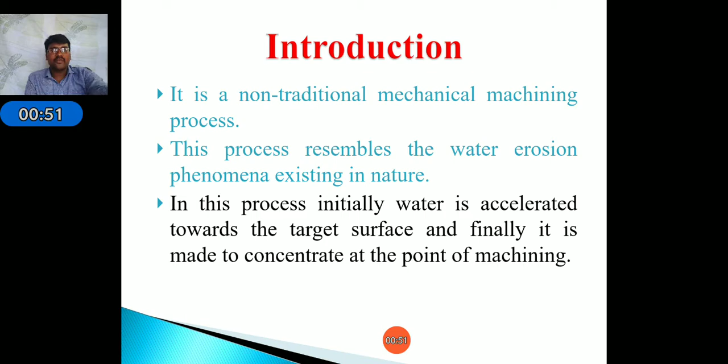Water jet machining is a non-traditional machining process in which the process resembles the water erosion phenomenon existing in nature. Initially the water is accelerated towards the target surface and finally made to concentrate at the point of machining, where the nozzle is placed at a certain distance to machine the workpiece.

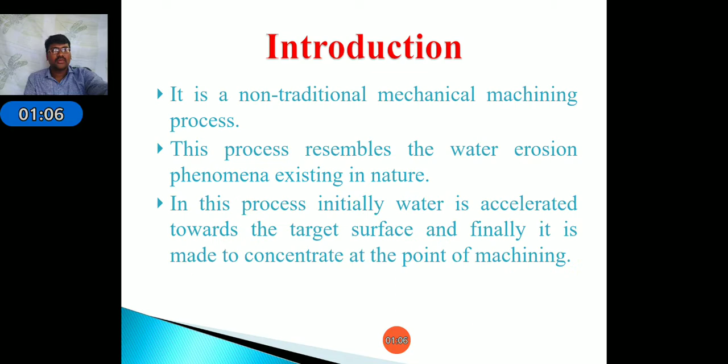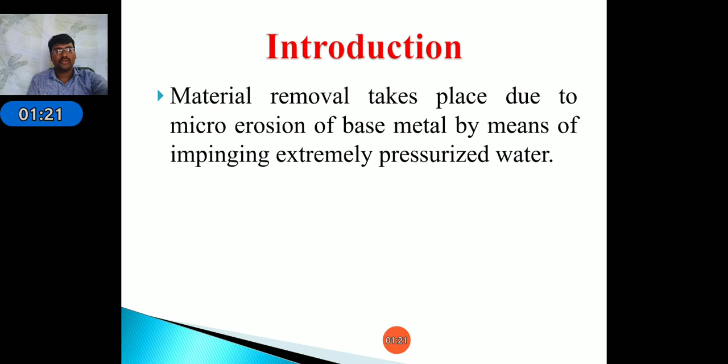The material removal rate takes place due to the micro erosion of the base metal by means of impinging extremely pressurized water. It is a cold cutting process, similar to abrasive jet machining.

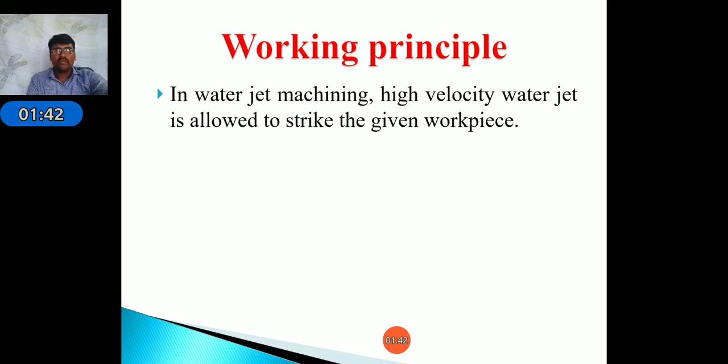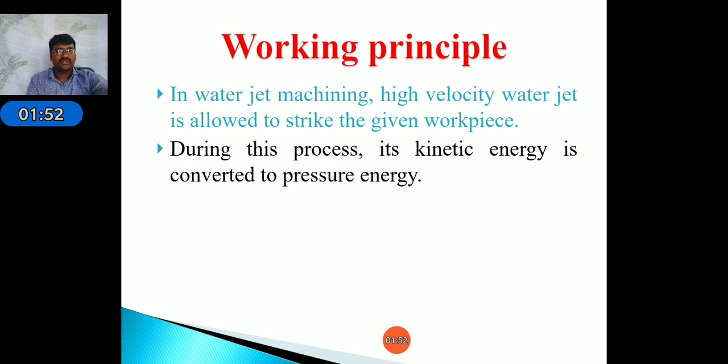Working principle of water jet machining: a high velocity water jet, higher velocity compared to abrasive jet machining, is allowed to strike the workpiece. During this process, its kinetic energy is converted to pressure energy, which induces stress on the workpiece. When the induced stress is high enough, unwanted particles of the workpiece are automatically removed.

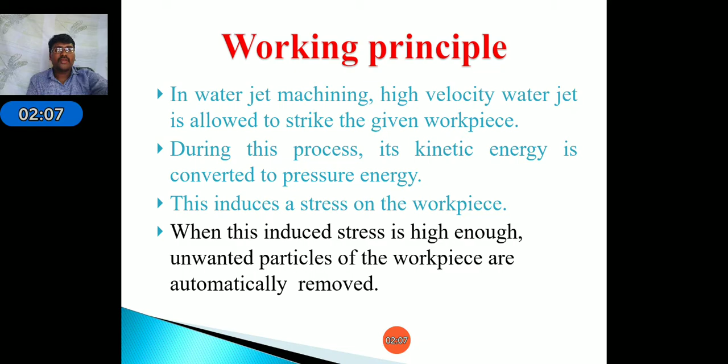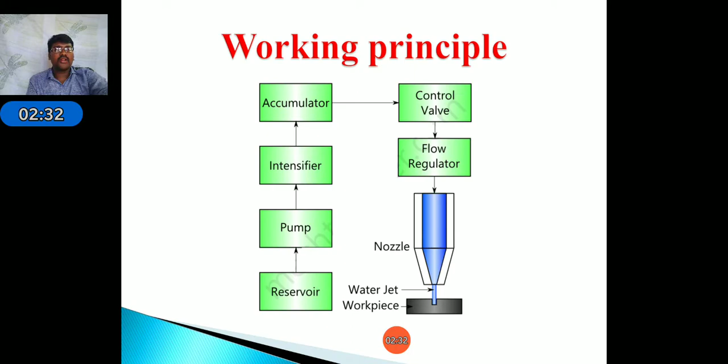The reservoir is used to store the water for the machining operation. The pump pumps the water from the reservoir stored water to the nozzle where we have to machine the workpiece.

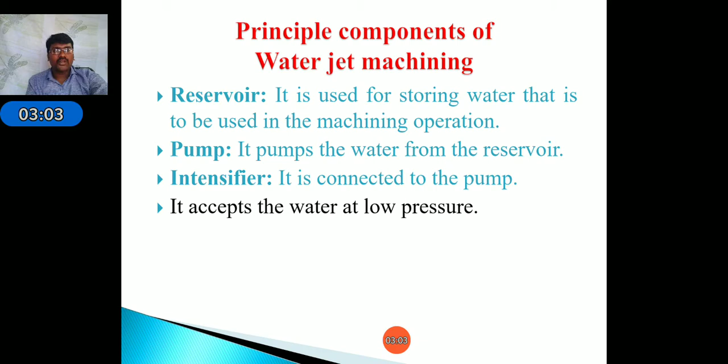What is the need for the intensifier? It increases the pressure energy. It accepts the water at low pressure and pressurizes the water acquired from the pump to a desired level, nearly 4000 bars pressure range. By using the intensifier, we can increase low pressure to high pressure.

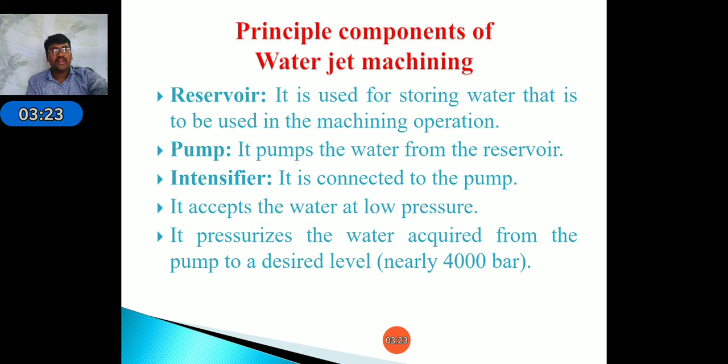The control valve controls the direction and pressure of the pressurized water supplied to the nozzle. The flow regulator is used to regulate the flow of water. The nozzle renders the pressurized water as a water jet at high velocity.

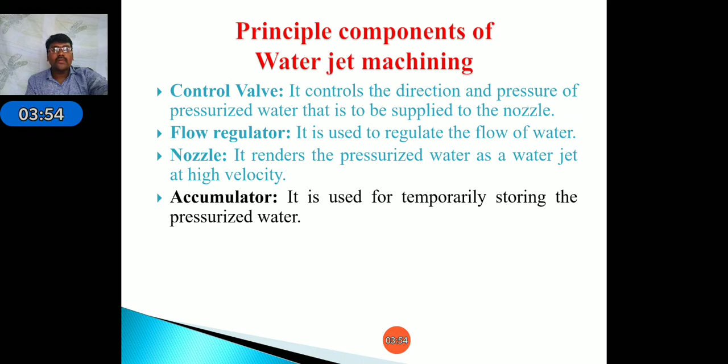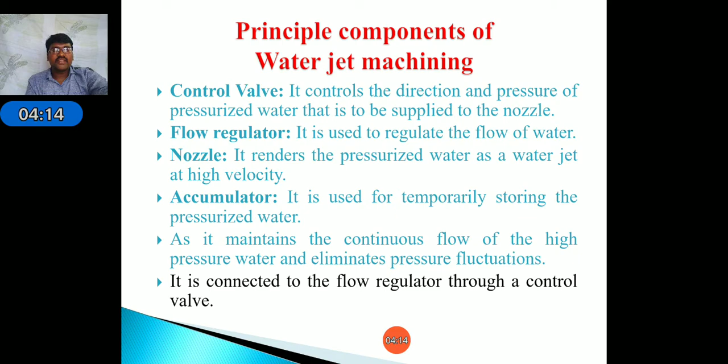The accumulator is used for temporarily storing the pressurized water. After the intensifier, we use the accumulator for temporary storage of high pressurized water. It maintains continuous flow of the high pressure water and eliminates pressure fluctuations. It is connected to the flow regulator through a control valve.

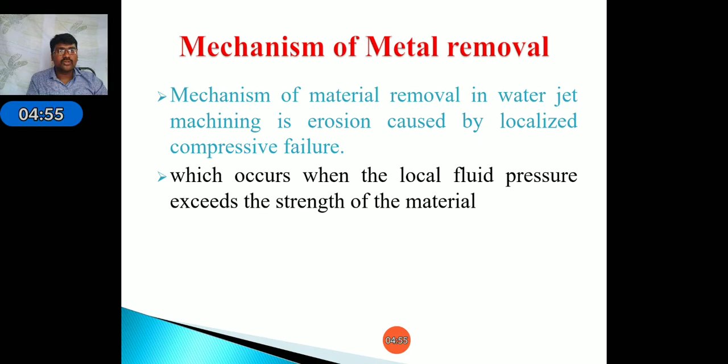Mechanism of metal removal: in water jet machining, it is erosion caused by local compressive failure, which occurs when the localized pressure exceeds the strength of the material. If the applied pressure is more than the strength of the work material, the particles where the water jet falls on the workpiece will erode, and due to this erosion the material is removed.

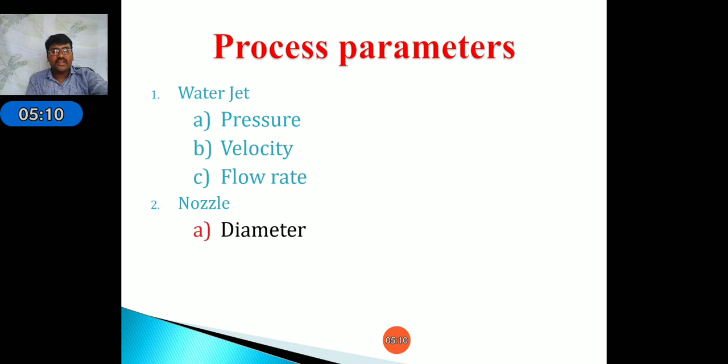Process parameters of water jet machining include pressure, velocity, flow rate, nozzle diameter, and standoff distance. Standoff distance is the distance from the nozzle end to the workpiece.

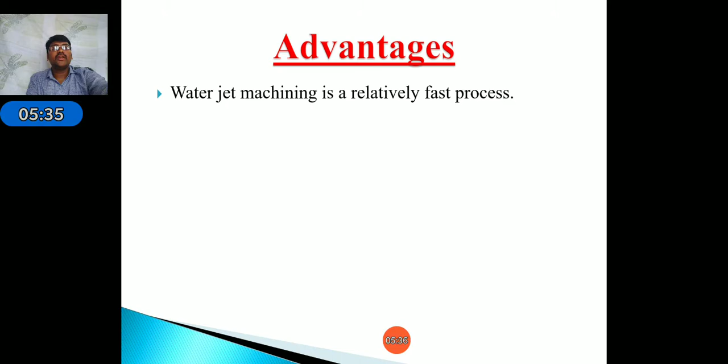Coming to advantages: water jet machining is a relatively fast process compared to other processes. In abrasive jet machining, the material removal rate is very low compared to water jet machining. It prevents the formation of heat affected zones on the workpiece since water acts as a coolant, so no heat is generated.

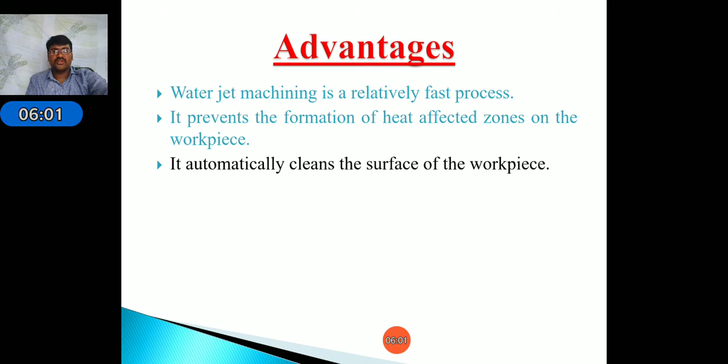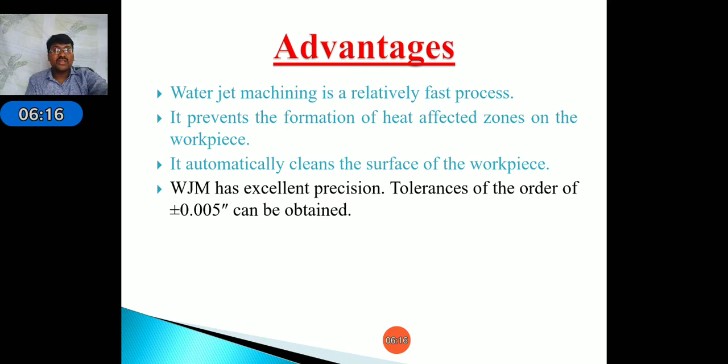It automatically cleans the surface of the workpiece due to the action of water. Water jet machining has excellent precision, with tolerance on the order of plus or minus 0.005, that much accuracy can be obtained. It does not produce any hazardous gas, and it is eco-friendly. These are the advantages of water jet machining.

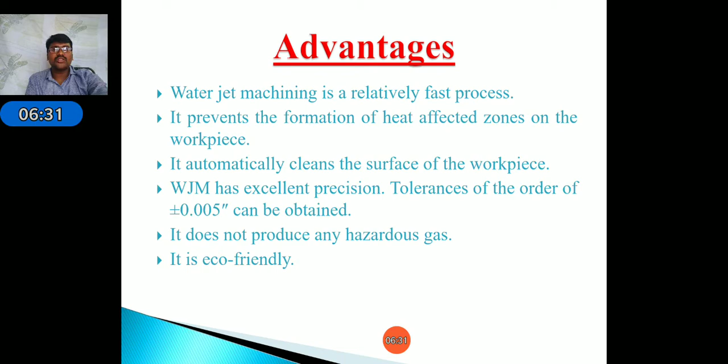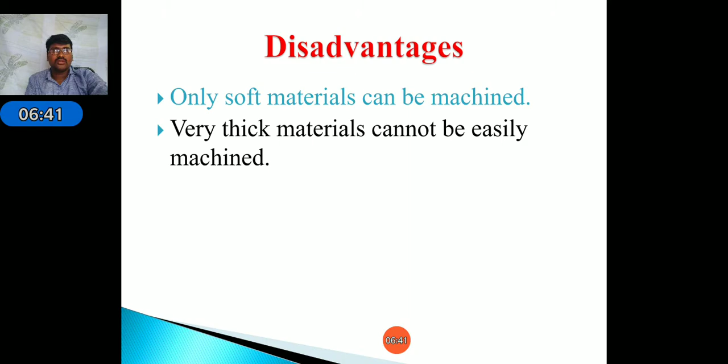Coming to disadvantages: only soft materials can be machined using water jet machining. Very thick materials cannot be easily machined, though thin materials can be easily machined. Also, the initial investment is high.

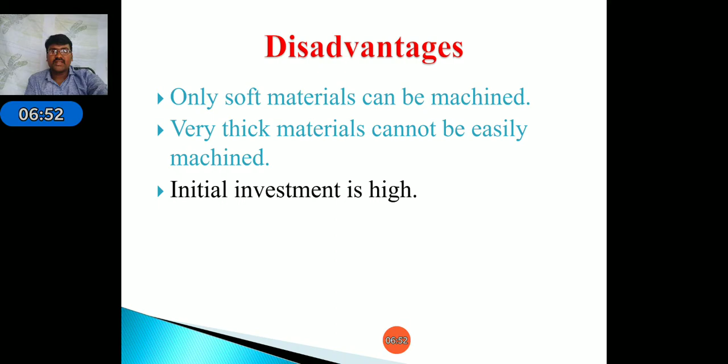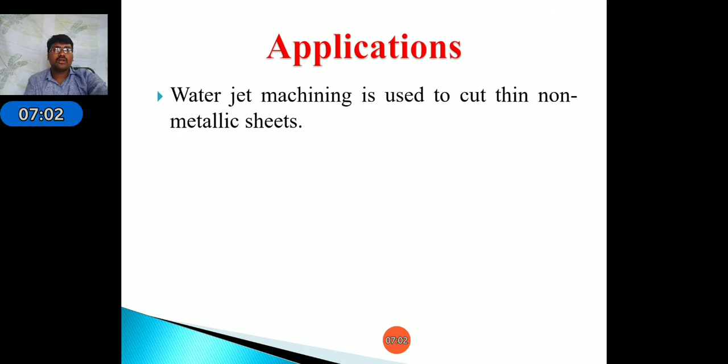Coming to applications: water jet machining is used to cut thin non-metallic sheets, because metallic sheets have high hardness and strength while non-metallic sheets have less strength. It is used to cut rubber, wood, ceramics, and many other soft materials, and it is used for machining circuit boards.

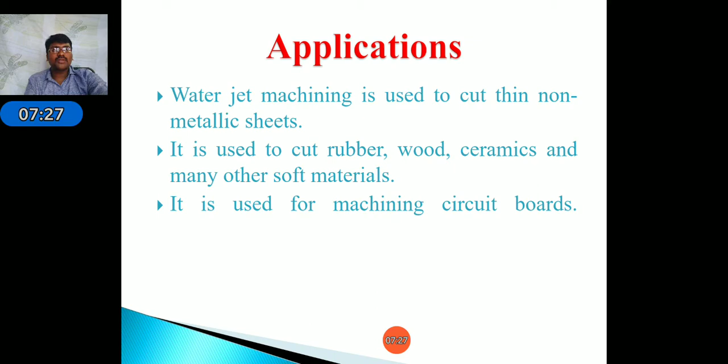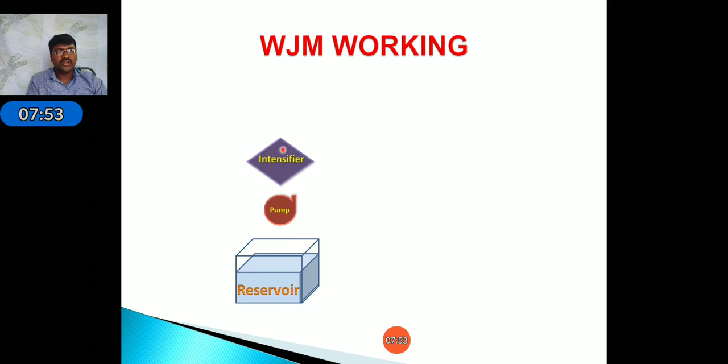Next, the working of water jet machining. Here we describe it step by step: the reservoir stores the water in the tank, the pump supplies water from the reservoir to the nozzle, and the intensifier increases the water pressure coming out from the pump.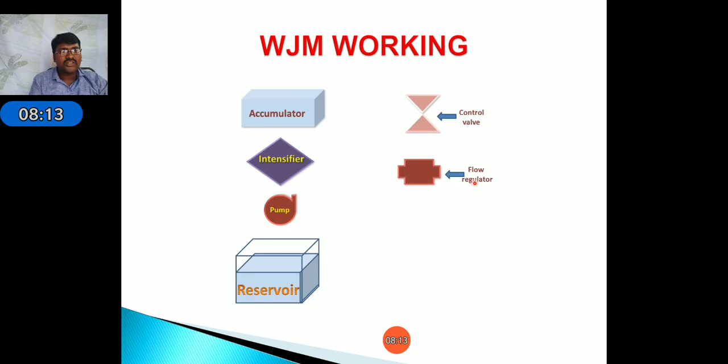The accumulator is a device used for temporary storage of the pressurized water. The control valve controls the flow of pressurized water, the flow regulator regulates the flow coming from the water reservoir, and the nozzle converts pressure energy into kinetic energy.

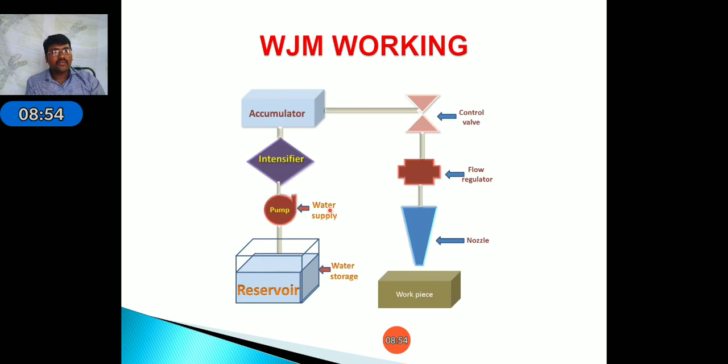The reservoir stores the water, the pump supplies water from the reservoir, the intensifier increases the water pressure, and the accumulator is used as temporary storage. The control valve controls the water flow, the flow regulator regulates the water flow, and the nozzle increases the kinetic energy of the water flow.

By using this process, we can machine the workpiece using the water jet. Okay, thank you.